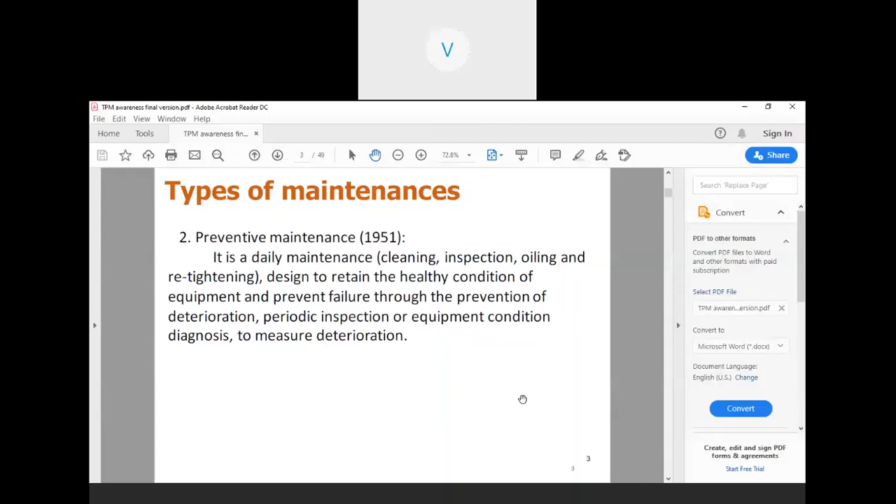TPM is total productive maintenance. Basically, a Japanese concept. I'm happy to share the information as an awareness session with you all.

As you all know, the breakdown maintenance started when the first machine was installed in the world. So, breakdown maintenance is nothing but you install a machine, wait for it to break down, then repair it and make it okay. So, that was the first maintenance a man has learned.

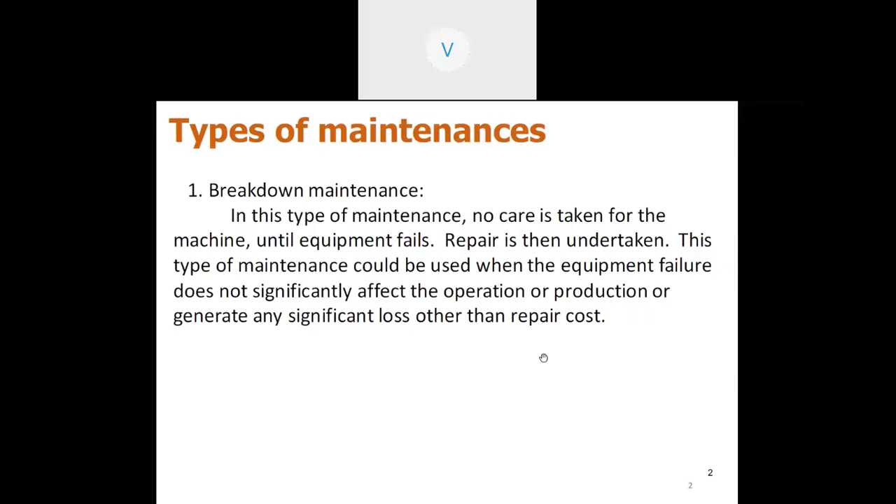And in the 1950s, people realized the necessity for a preventive maintenance. So that's how they started doing some kind of a cleaning, inspection, oiling. Some people used to call it overhauling, and the preventive maintenance has stepped in order to prevent the deterioration, with periodic inspection or equipment condition diagnosis.

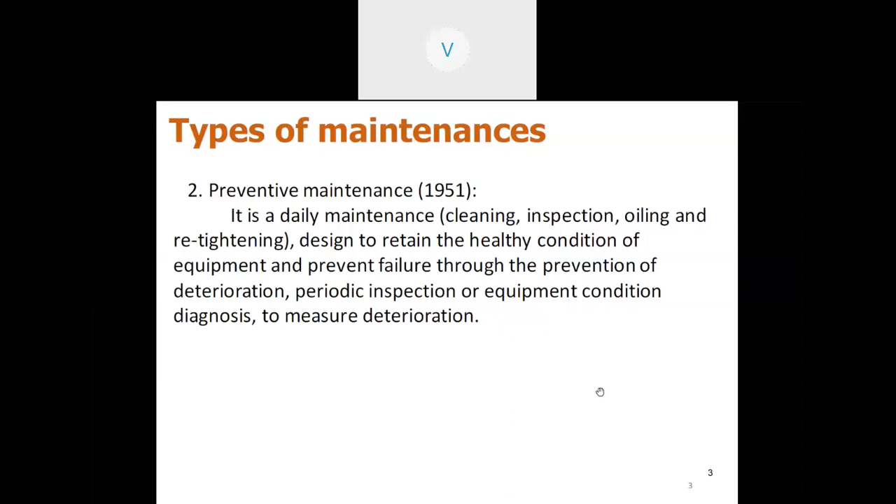There came the periodic maintenance, what is called a time-based maintenance. They fixed a particular time, say once in a month or once in 15 days, and started maintaining the machines. Another concept came in, which is called predictive maintenance. It's also known as condition-based maintenance.

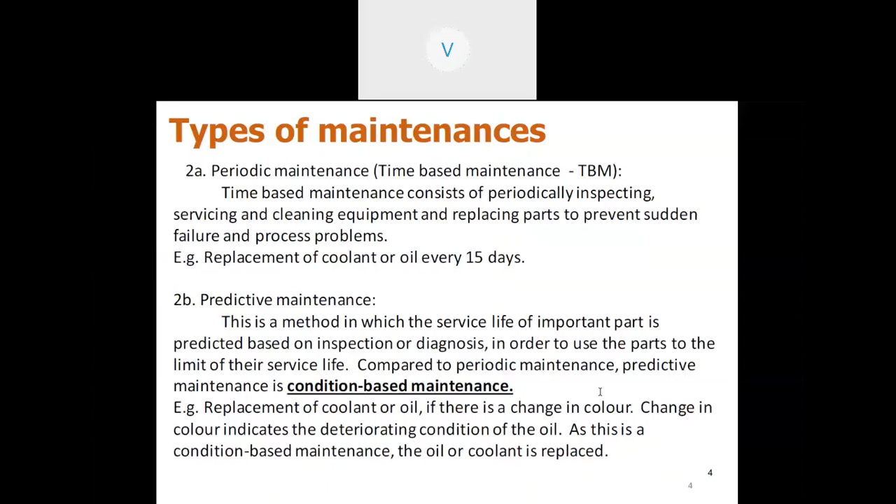So what they normally do, they check certain parameters of each machine at regular interval, understand the conditions, and started taking corrective actions based on that. For example, replacement of coolant or oil, or you can even talk about some analysis like the thermal analysis. Some people even use a stethoscope to check the condition of the machines, to check for any abnormal sounds. So that is called a condition-based maintenance.

There is also a concept which came in as corrective maintenance. So if there are any weaknesses in the design of the machine, the experience says what are the corrective actions to be done. The equipment with design weakness is redesigned for improving the reliability. That's called corrective maintenance.

Then the concept of maintenance prevention came in 1960, which is one step above the corrective maintenance, which means you also understand what is the design problem of the machine and inform the machine supplier so that the design problem is avoided. So the weakness of current machine is sufficiently studied and shared with the equipment manufacturer. So necessary changes are made in the design of the new machines.

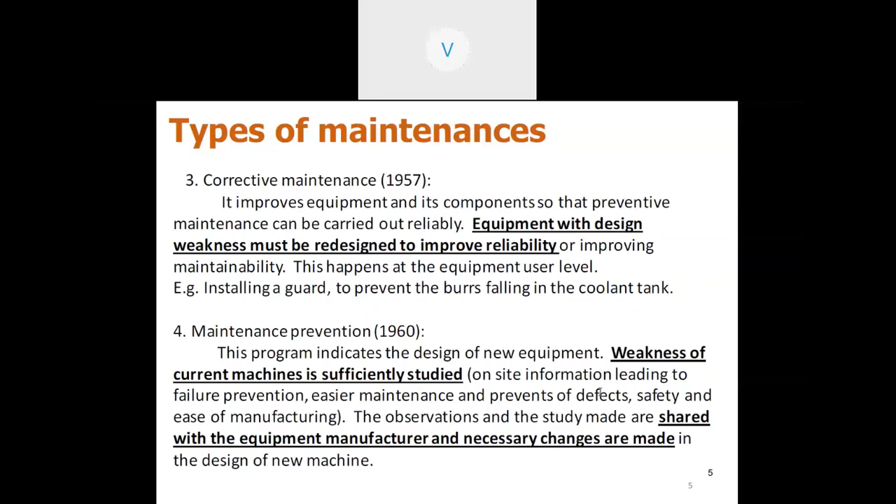So before TPM has come in, these were the history of types of maintenances. Even now, these are currently in use. But TPM is the one which encompasses all those things. The founder of Marshall Institute, George Smith, used the philosophies of best practices of US and Japan. So by combining the best practices of US and Japan, he came up with the philosophy of total productive maintenance.

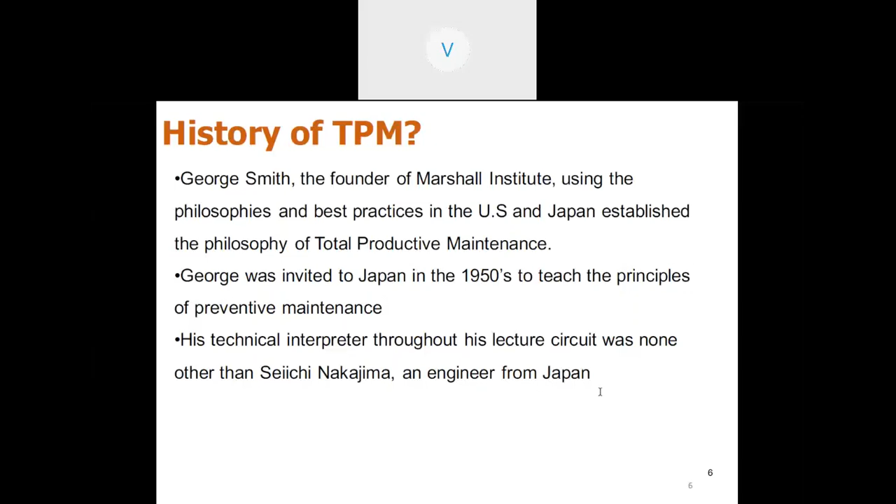In 1950, he went to Japan. He was invited to Japan rather to teach principles of preventive maintenance. At that point of time, there is a guy by name Seiichi Nakajima, an engineer from Japan, who was the interpreter for him all through. So he took all the inputs and he developed TPM in the early 70s.

In the 1950s, the beneficiary was Nippon Denso, and in the 1970s, Nakajima developed a TPM, which is a hybrid for preventive and predictive maintenance, mixing these two together and several engineering methods. So it also carried a very important principle of thorough employee involvement. So all the employees will be involved in the hybrid of preventive and predictive maintenance.

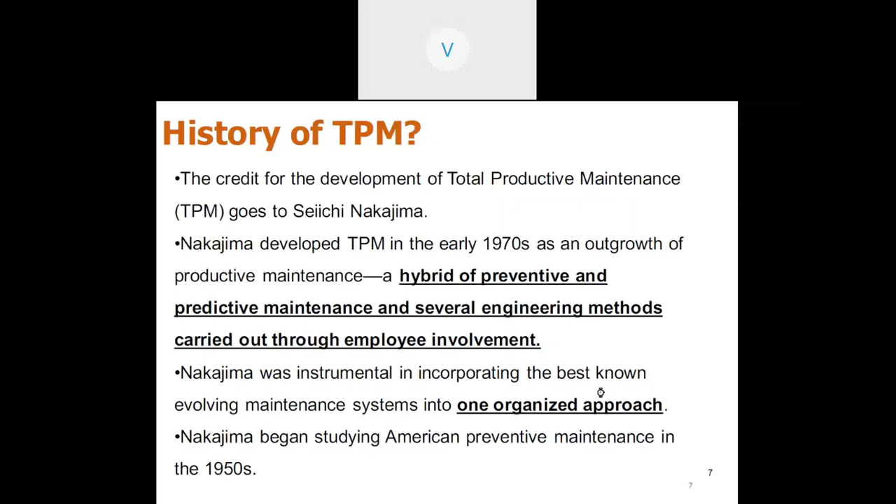They have a movement called just in time. You must be very familiar with this concept by now, which is JIT. So, Toyota applied these principles and successfully implemented the JIT. They did it by minimizing the delays caused by equipment problems, and TPM is a total contributor in streamlining the flow of production.

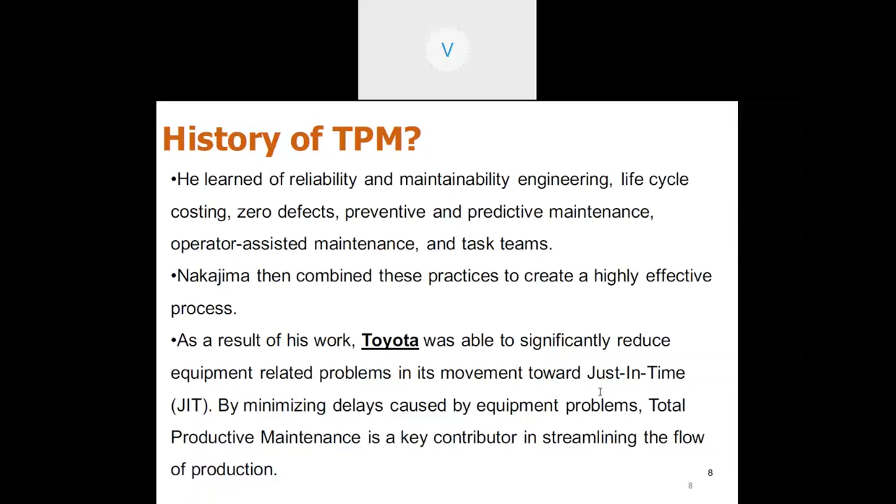So, with this background, now you can see what is the TPM. It is maximizing equipment effectiveness through involvement of all supporting departments, which means your equipment will be effectively run. The supporting departments will be involved very actively.

So the goal of TPM is to improve overall productivity by optimizing equipment availability. Fundamentally, you will get higher equipment time so that you have higher productivity, and all the people are involved in making the equipment available.

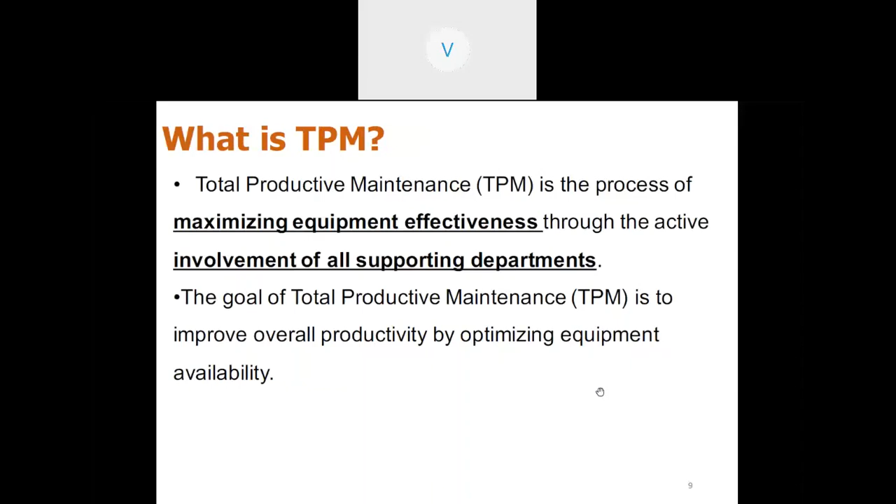Now, as the word says, total productive maintenance. Total is nothing but all employees are involved with an objective of eliminating accidents, defects, and breakdowns. Productive means production of goods and services that meet or exceed our customer expectations. So, in order to achieve that, actions are performed while production goes on.

That is, while running the machine itself, you are doing the maintenance, and production challenges are also minimized by maintaining the machines. So, maintenance means keep the machines in good condition: you repair them, clean them, lubricate them, inspect them, tighten them. Whatever is needed to maintain the machine in the running condition, you have to do while the machine is running. So, in short, productivity improvement of the machines through the involvement of everyone.

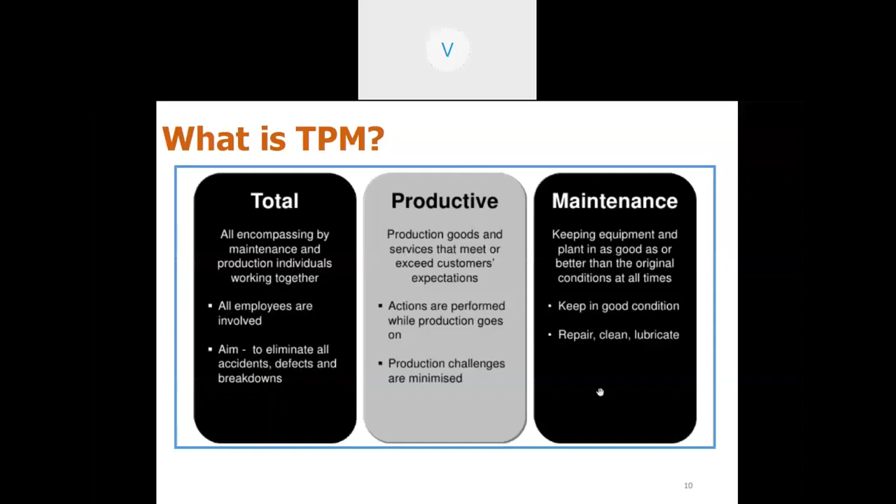So, what is TPM to the organization? Overall equipment effectiveness goes up significantly. It reduces firefighting to repair the machines. It improves operating costs. It is better able to meet commitments to customers and has improved ability to compete in the world markets. It also benefits the employees because they have less pressure on maintenance.

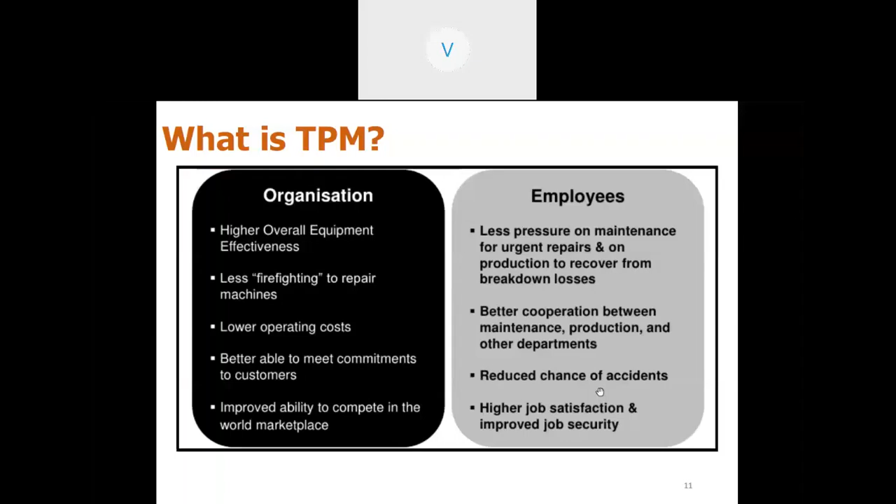There is no firefighting for urgent maintenance. Better cooperation between maintenance, production, and other departments. It reduces the chance of accidents, gives higher job satisfaction, and improved security for all the employees. Now, if you ask why TPM, finding out the advantages of TPM: it avoids wastage in a quickly changing economic environment, produces goods without reducing the product quality. It also reduces cost.

It produces low batch quantity at the earliest possible time. This is another important thing. You are able to produce lower batch quantity at the earliest possible time because some companies will have a resistance in accepting minimum batch sizes. I know there are companies which can even produce single pieces to the customer. Goods sent to the customer must be non-defective. So, from an accountant's perspective, TPM is a management way to reduce the cost and enhance the bottom line.

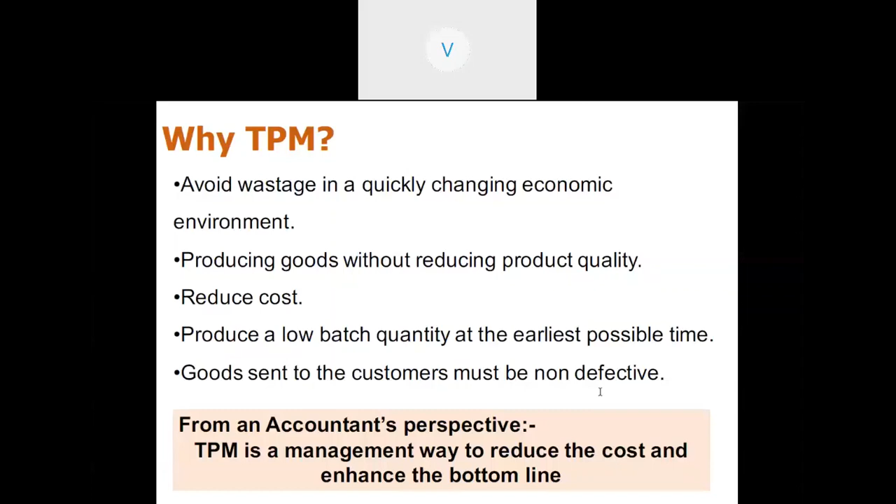So, in this presentation, I am going to speak about how TPM is resulting, what are the concepts of TPM, and how it is helping you in improving the bottom line. There is an institute called the Japan Institute of Plant Maintenance, which is the highest level of institute in Japan for maintenance purposes. It also gives awards to the best maintained TPM company.

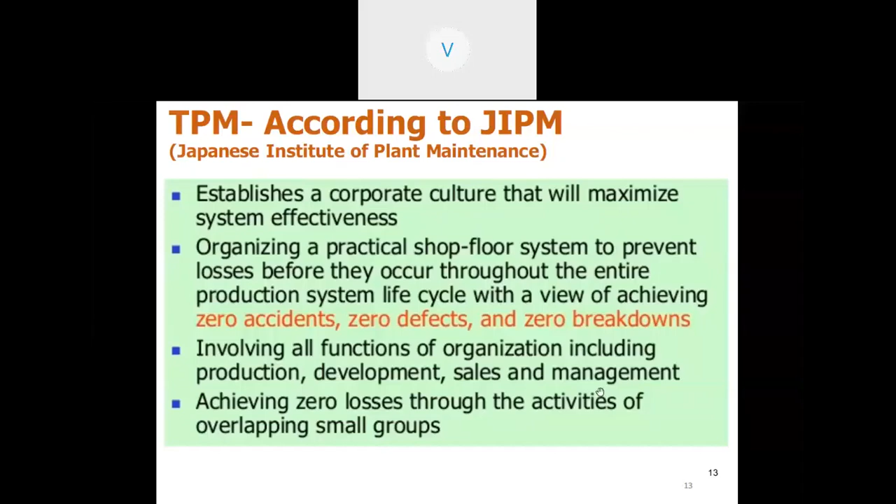And according to JIPM, the benefits are: TPM establishes a corporate culture that will maximize the system effectiveness. TPM organizes a practical shop floor system to prevent losses before they occur, like zero accidents, zero defects, and zero breakdowns. TPM involves all functions of the organization, including production, development, sales, and management. TPM also achieves zero losses through the activities of overlapping small groups. These are the four broad benefits as specified by JIPM.

Look at the first pillar, which talks about individual improvement. In Japanese, this is known as Kobetsu Kaizen. The purpose of this pillar is to realize zero losses of all. There are so many hidden losses and open losses taking place in a company. So the purpose of this is to realize zero losses and also to demonstrate ultimate production efficiency. This is done through activities like understanding the 16 major losses. As we go along, we'll see what are the 16 major losses taking place in any company.

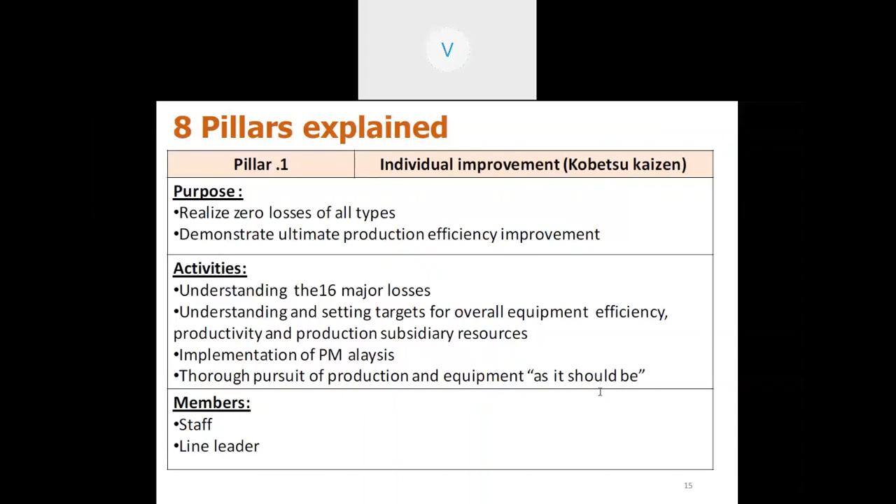Second is the downtime. One is equipment failure. Second is setup and adjustments. One, the equipment breaks down. Second, the equipment takes a lot of time for setting up. It may be from changeover from one variant to the other variant, or any other thing, even the first setup of a first sample. So all these things are downtimes.

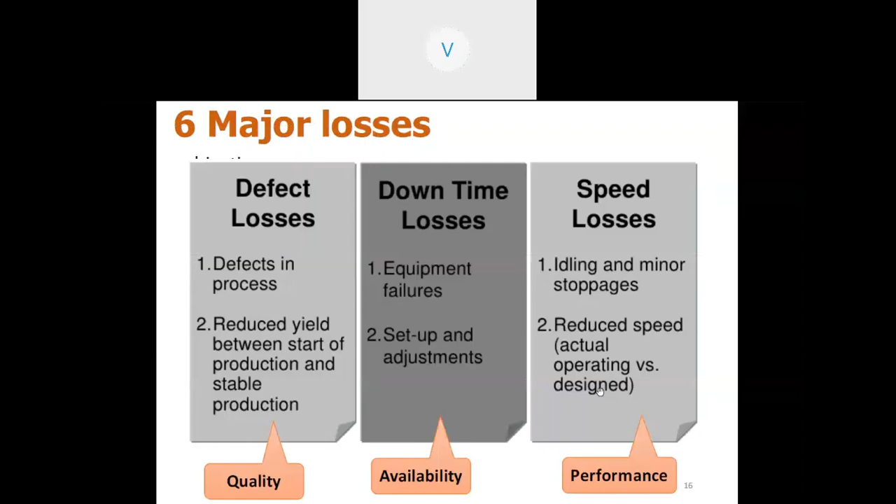you see these are divided into 3 categories: availability, performance, and quality. So the unplanned stoppages, tooling failure, unplanned maintenance, overheated bearing, motor failure, etc. These are called unplanned stoppages. These are coming under availability losses. Second category is setup and adjustments like setup, changeover, material shortage, operator shortage, major adjustment, warm up time, etc. These come under availability loss.

Now, small stops: component jam, minor adjustment, sensor block, delivery block, cleaning, checking; all these things are small stops, performance losses. Slow running: incorrect setting, equipment wear, alignment problem, these are all resulting in slow running. These are all also under performance losses. Scrap and rework, these are quality losses. Again, rejection due to warm up, startup, or other early production, these are all quality losses. So now you can imagine the three types of losses are very important for you to understand: availability, performance, and quality.

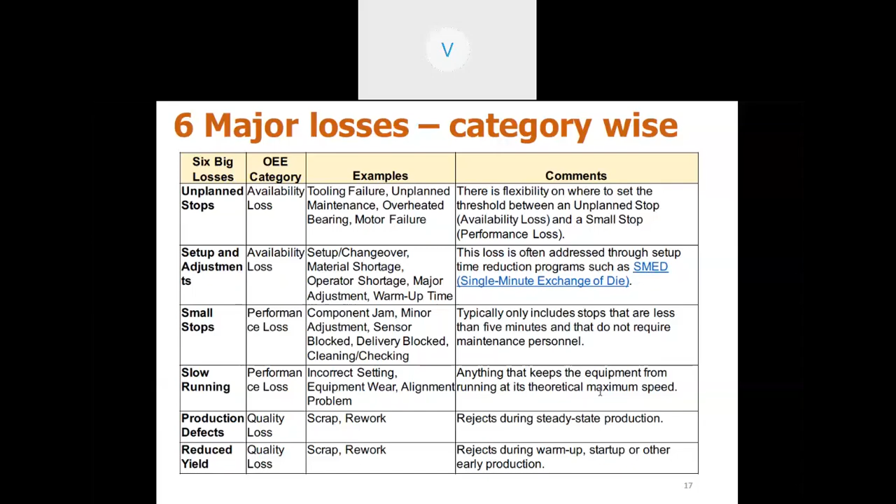Now, this can be taken to a deeper level to identify, typically in an organization, and broken up into 16 different types. Losses that impede equipment efficiency: there are 8 losses. For example, failure losses, breakdown losses, setup, then cutting blade loss, startup loss, minor stoppage, speed loss, then defect, scheduled downtime. These are all arising out of equipment efficiency.

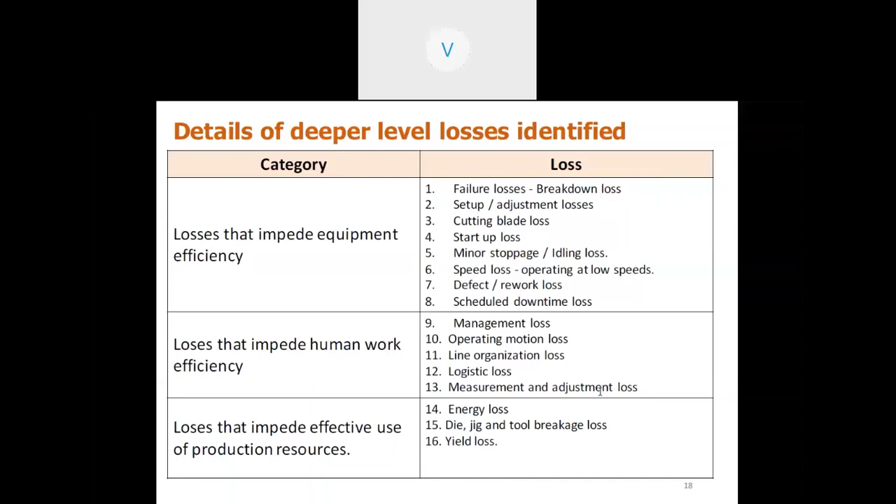And second set is losses that impede human work efficiency. For example, management loss, operating motion loss, line organization loss, logistic loss, measurement and adjustment loss. These are related to human work efficiency. There are 3 losses: energy loss, die, jig and tool breakage loss, yield loss. These are related to ineffective usage of production resources. This is a typical breakup of losses in a particular type of engineering industry. For each industry, we can identify such losses in these 3 categories.

So when you look for those losses, you analyze those losses, you analyze the cause of those losses, and take corrective action, which means those losses should not recur. So you will be improving the availability, performance, and quality. The accumulated effect of availability, performance, and quality is called overall equipment efficiency, what we call OEE. We'll see a case study towards the end of the presentation of how the OEE is improved.

Now moving on to the second pillar, which is called Jishu Hozen. It is also known as autonomous maintenance. The purpose is training operators proficient in the equipment, protecting one's own equipment by oneself. This involves 7 major activities. Number 1, initial cleanup. Number 2, countermeasures for source problems and difficult to access locations. Number 3, creation of tentative autonomous maintenance standards. Number 4, general inspection. Number 5, autonomous inspection. Number 6, standardization. And number 7, rules management. I'll explain in the subsequent slides. There are 7 steps involved in this.

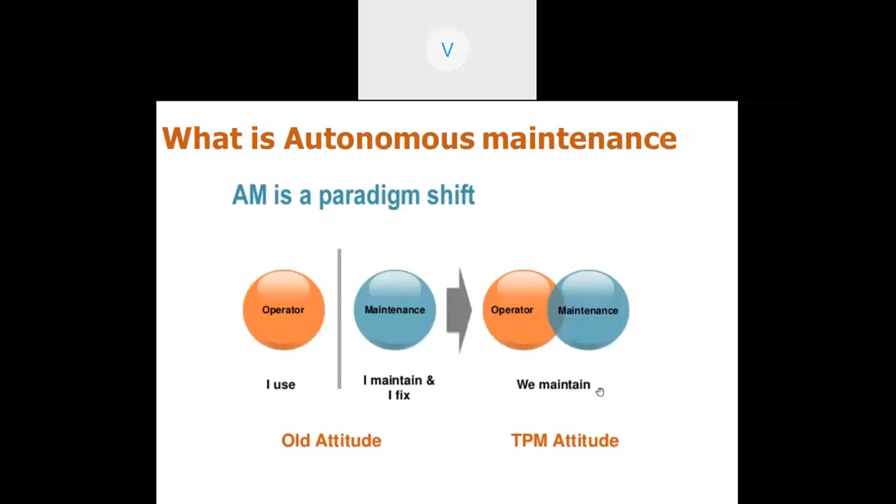How does it work? We start with education. First thing is we educate all the employees about the machine. We make machine component sheets. We break up the machine into various parts. What is each component? How does it work? How can it fail? So the education papers or standards must be prepared by us for each of them, and the operators must be taught as a first step.

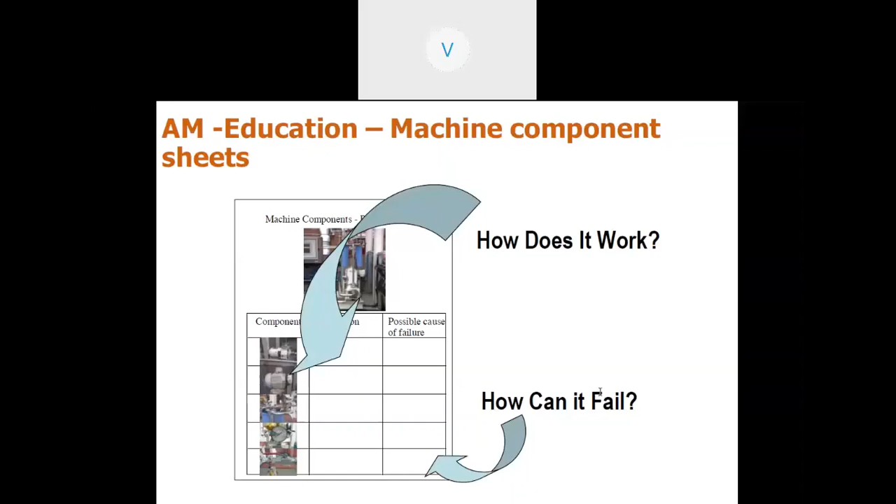We call it one-point lessons. A one-point lesson means you are explaining the function of the machine. It is used for three purposes. Number one, it gives the basic knowledge. Number two, it talks about an improvement idea. Number three, it also talks about a downtime problem. So as you can see, there is a small, beautiful pictorial information available in this, which is called a one-point lesson.

And in this case, you are also seeing it starts with one person and goes to the next person. That is, suppose I start with this, then I become the master, and I tell the second person, he understands, he puts his signature at the bottom, then he goes and teaches the third person. So for the third person, he becomes a master, and the third person becomes master for the fourth person. That's how the chain continues until all the people in the department are covered.

So that's how it's called a one-point lesson. You are teaching on basic knowledge, you are teaching on an improvement idea, and you are informing about a downtime problem. So that's how the information is passed on to everyone, and everybody becomes knowledgeable through this one-point lesson.

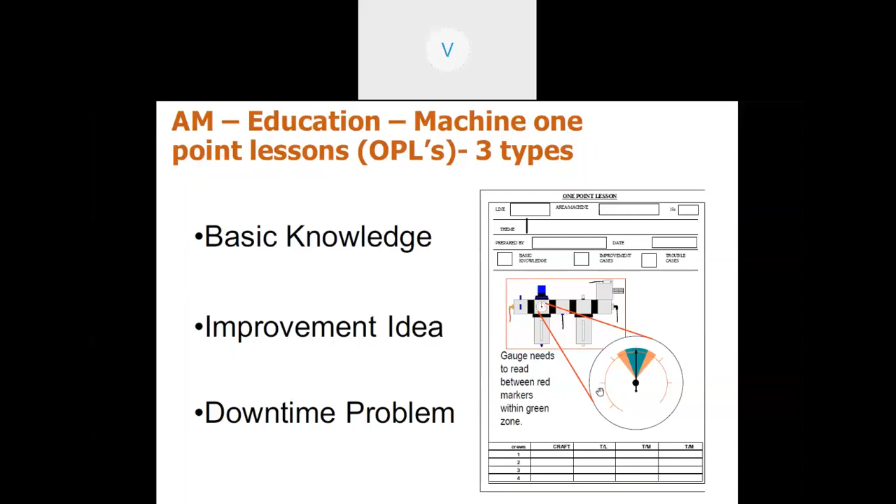This is another format which is arising out of autonomous maintenance. You will be able to appreciate this format. There are various problems arising in a machine. It may be electrical, mechanical, lubrication related, hydraulic, pneumatic, and water related. And there are 9 classes of problem like loosening, wearing out, broken, leaking, missing, dirty, difficult to clean, location, then poor design.

Suppose I say L7. L7 means it is a lubrication related problem and difficult to clean. I say H2, the hydraulic system is worn out. If I say W4, water is leaking. P5 means a pneumatic thing is missing. So you can work with any of these combinations, right? 6 into 9, 54 combinations are possible. So once you identify it on any machine, you write down the details of what the fault is and you record it. So it becomes a very good database for permanently repairing this equipment. So this is called the cleaning and inspection machine fault finding sheet.

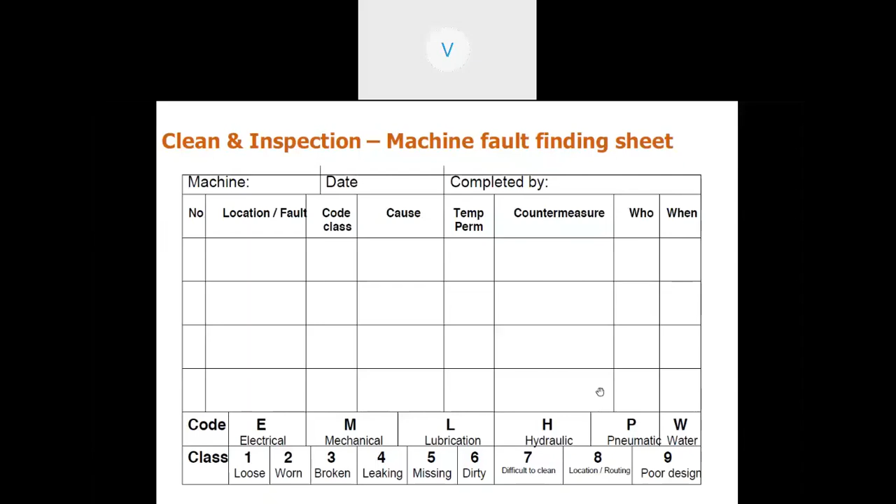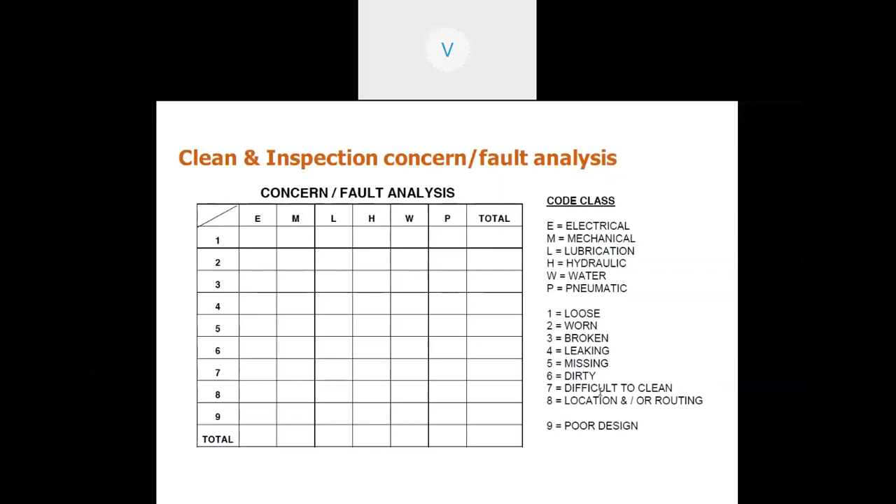Now I just go back to the 7 steps. It is important for you to understand. We educate the people, and involve them in cleaning up. When you clean the machine, you touch the machine by hand. So you know where the defects are and what types of defects are present. So you are able to see personally what defects are there and take action. Also, there are places which are not accessible on a machine. So you can take action to make the machine part accessible.

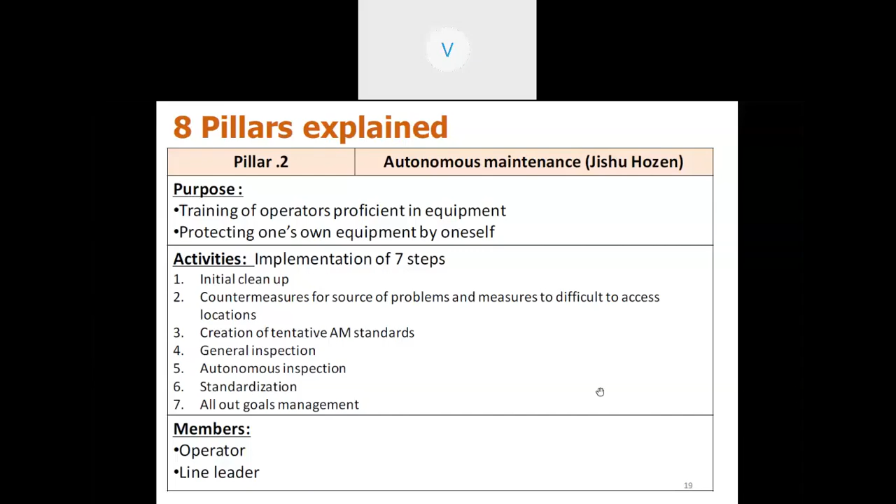Using your knowledge, you are creating the autonomous maintenance standards by way of one-point lessons, check sheets, other SOPs, and so on. And you also create a general inspection procedure. You also carry out an autonomous inspection procedure. Create the standards for all these things. Then achieve your goals. So these are the steps of autonomous maintenance. To simply put it, my machine. The concept is my machine.

Pillar number 3 is planned maintenance, which is called Keikaku Hozen. The purpose is improving efficiency of maintenance department to prevent 8 major losses. So number 1, the activities are daily measures, periodic maintenance, preventive maintenance, by which you can extend the lifespan, spare parts management, failure analysis, and prevention of recurrence. So these are the activities which are taking place in this.

Nothing but you have plans everywhere. What are you going to do on a daily basis? What will you be doing as part of periodic maintenance? What are the activities related to predictive and preventive maintenance? Then how will you improve the lifespan of each part? How will you maintain the spare parts? So these are the activities involved in this pillar.

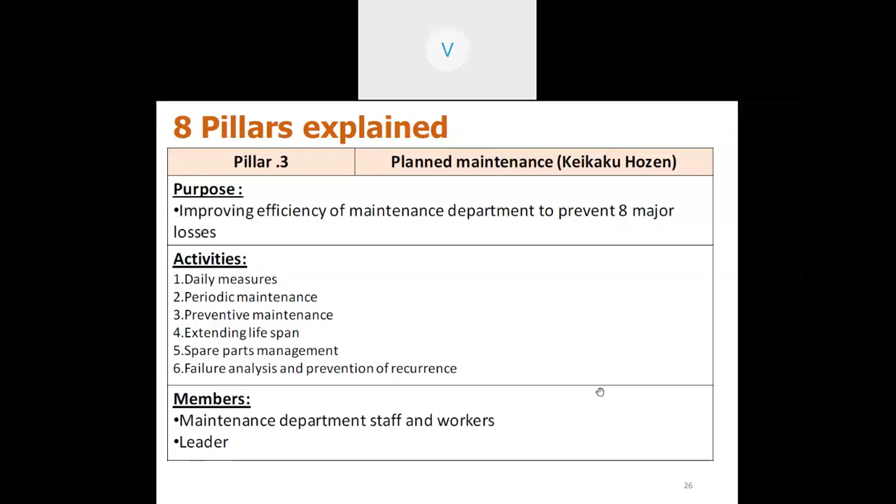The next pillar is very important, which is the most important pillar in any organization, which is the quality maintenance. This is called Hinshitsu Hozen. Achieve zero defects by supporting and maintaining equipment conditions. This is the purpose. So the activities involved are verify quality characteristic, standard, defect phenomena, and performance.

What you are supposed to do is, what is the property of the product needed? Is it as per the standard? What is the defect phenomena? Phenomena means the problem, and how it affects the performance. You understand that? Investigating the conditions for building the quality at all stages. Suppose there are 10 processes involved in making a product. At all the 10 processes, you have to build the quality. You have to set up the controls at all the 10 processes.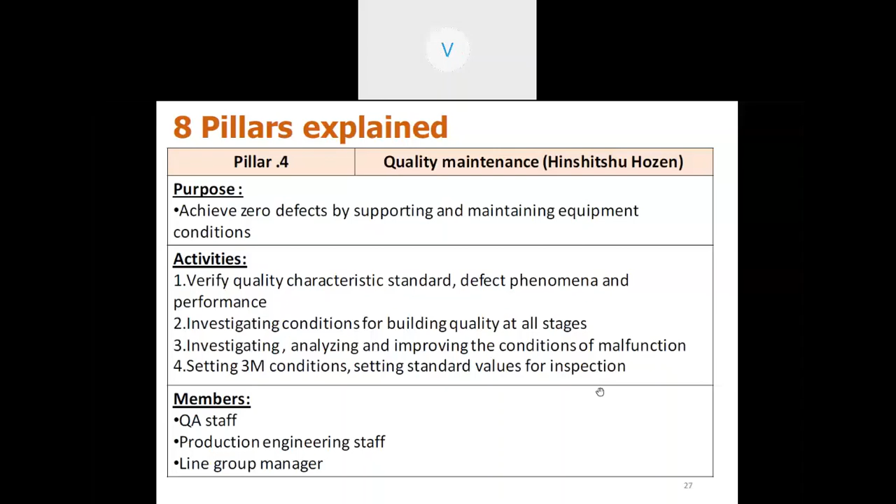Investigating, analyzing, and improving the conditions of malfunction. If there is any malfunctioning taking place in any of the places, you will have to investigate, you have to analyze, and improve the conditions. Setting 3M conditions. 3M means man, machine, material conditions. Setting standard values for inspection. So fundamentally, you take a defective product, you analyze the process by way of man, machine, and material, and the members who are going to be involved will be the QA staff, production engineering staff, and the line group. Can you sum up the quality?

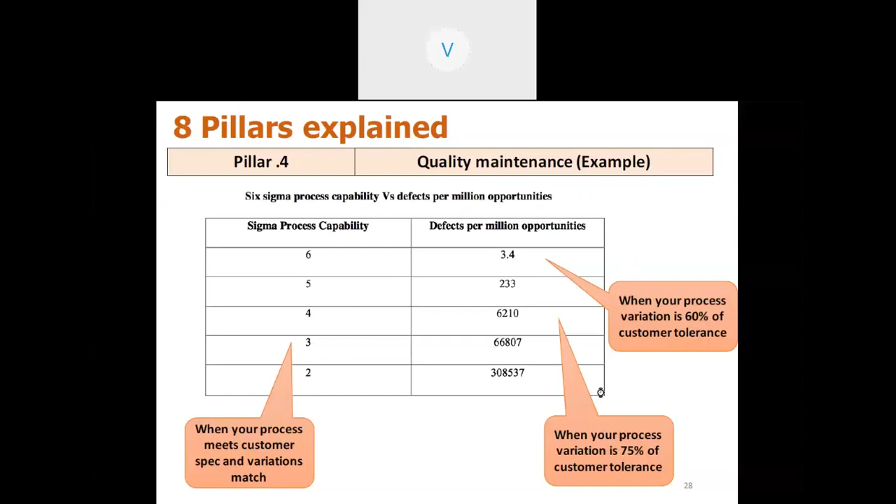If the time had been shortened, by now we would have had a lot of ventilators. At the same time, you look at the safety wear, whatever they produce overnight. I think we moved from a zero capacity to 1 lakh per day capacity. So these are certain examples which you can see.

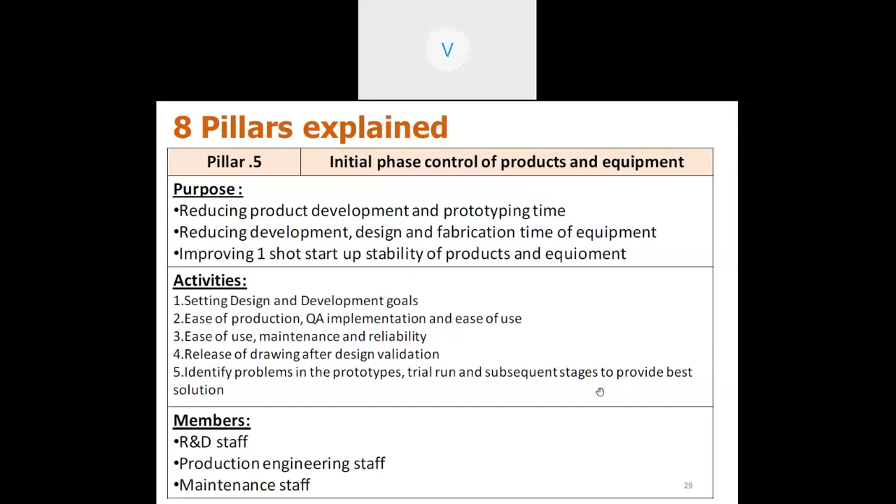Had they checked their drawing, had they checked the prototyping properly, this mistake could not have been committed. So the car, even though it is a wonderful car, had a commercial disadvantage. So initial phase design control is very important. TPM emphasizes this. Pillar number 6 of TPM.

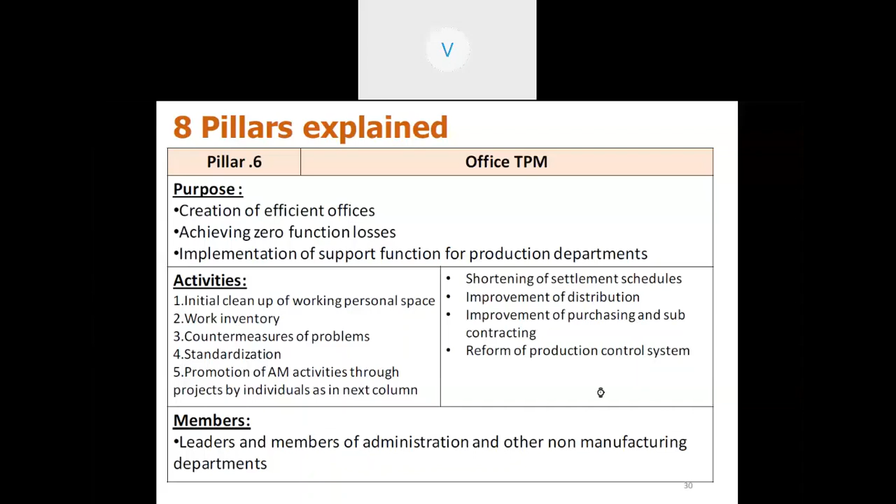By the way, the JIPM, we talked about JIPM. If you want to showcase any improvement to them, all the backup papers should be shown to them within 15 seconds. The retrieval time is 15 seconds. If you don't show the things in 15 seconds, they take it for granted you are not organized.

Non-availability of correct online stock status, customer complaints due to logistics, expenses on emergency dispatches, and purchase. Actually, there is a thing called a premium freight. When the dispatch to the customers is not done on time, then all the necessities come up, all the urgencies come up. You have to send the material on time.

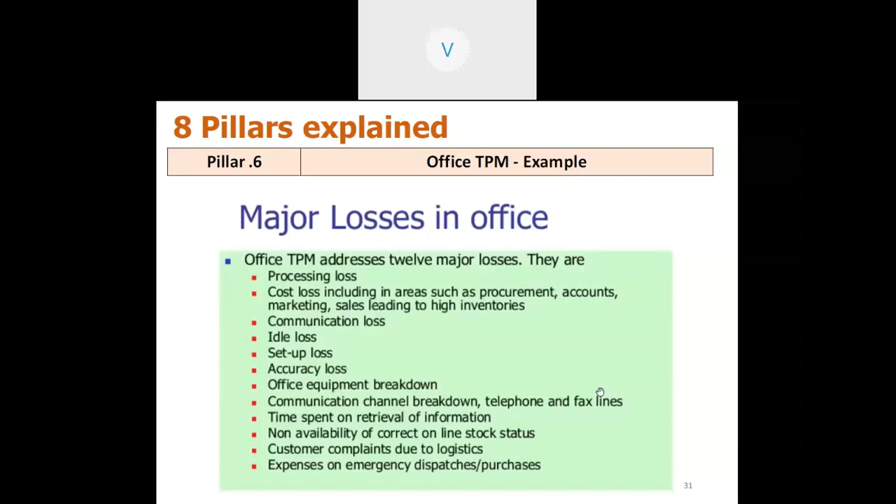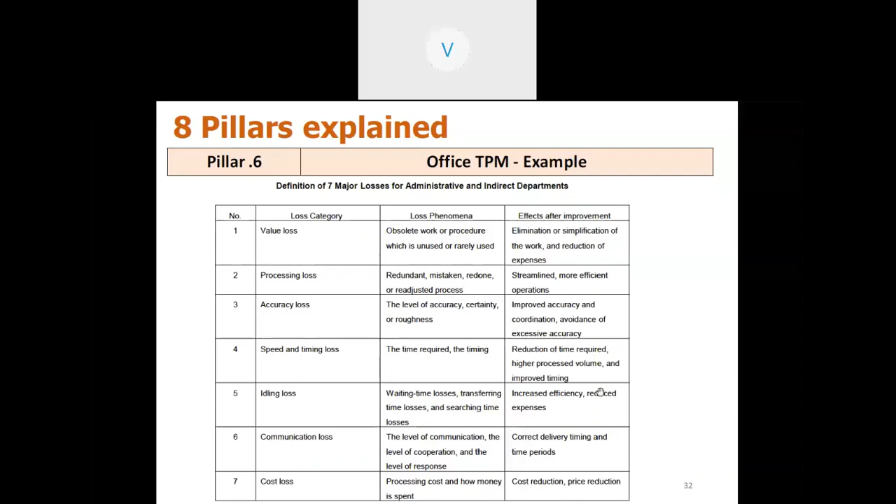The seventh loss is cost loss. Processing cost, and how money is spent. So that's a phenomenon. If you make an improvement, you have cost reduction and you have price reduction. So these are the typical 7 major losses in the administrative and indirect departments. So one can list all the problems related to this and work on this. Office TPM helps you in identifying and eliminating these 7 types of losses.

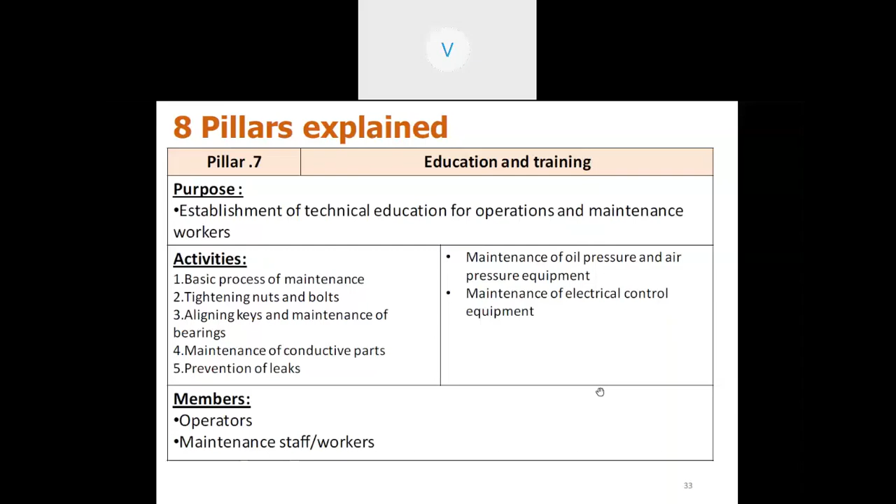These are the 5 major activities you have to definitely work on. These are very commonly seen in all the manufacturing plants. So if you address all these 5, that gives a very good education to all the workmen. So maintenance of oil pressure, for example, air pressure equipment, maintenance of electrical control equipment. These are some examples. How will you maintain oil pressure equipment, air pressure equipment, electrical equipment? So if you prepare a maintenance standard for all these things, it will help educate your employees on operations as well as maintenance.

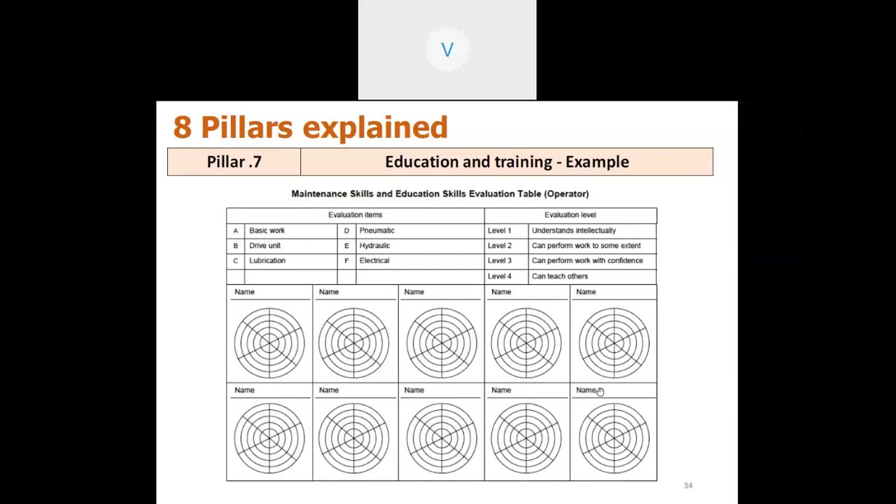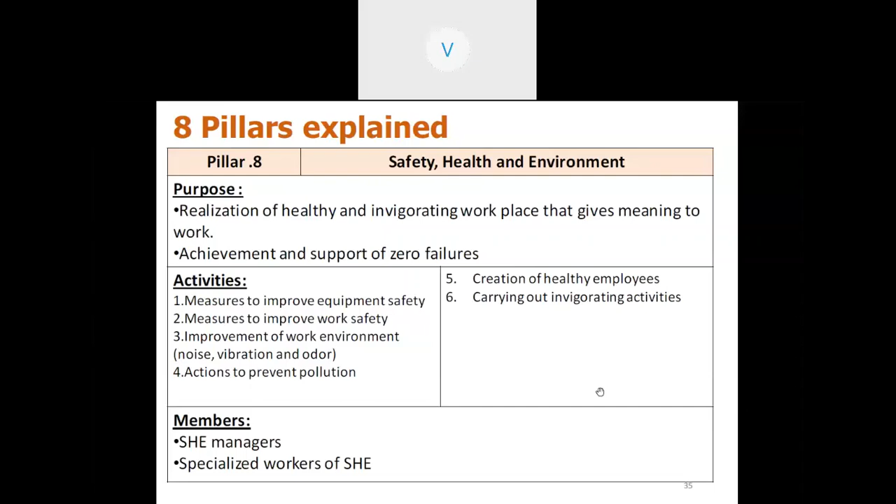So basically the work spot becomes unsafe because of two major things. Unsafe condition of the machines and the environment, then unsafe act performed by the employees. So we have to focus on these two and immediately correct, create the standards and ensure that they follow the activities and the machine conditions are. You should also ensure the work environment is noise free, vibration free, and odor free. We also act to prevent the pollution and you have to create healthy employees. You know, some of you must be having the standards like ISO 14001, ISO 45001, or OHSAS.

ISO 14001 is Environment Management System, which means it talks about the environment, how to keep the environment clean, and how to manage the environment. It talks about a study called Aspect and Impact. Aspect and impact means what are the aspects of the way you work and what is the impact on the environment. Like the impact on the ground, impact on the air, impact on the water. So you have to study that and take appropriate action to reduce the impact.

And the ISO 45001 or OHSAS, this talks about an analysis called HIRA, which is hazard identification and risk assessment. While you do your work, what are the hazards involved in that and what is the risk? So you measure it and you take controls by which you can reduce those hazards. So you explain your work, explain the way you do each process and each work. You analyze what are the hazards involved in that and what are the controls to ensure that the risk is done away with. So that's the purpose of HIRA.